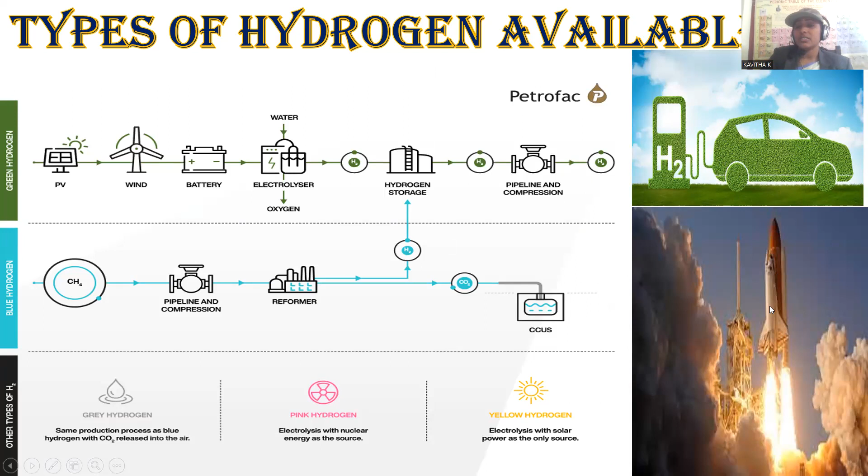Now let us see in detail the description for these hydrogens, whichever available, and along with these you can observe the application of hydrogen. Hydrogen is the primary element in the hydrogen-oxygen fuel cell construction, which is the primary energy source for rocket fuel.

Here you can observe the categorization of hydrogen: gray hydrogen, blue hydrogen, and green hydrogen. Gray hydrogen's starting material is natural gas, which gets split into elemental species like hydrogen and carbon. Whatever is present in the natural gas gets converted into carbon dioxide, but here the carbon dioxide is emitted directly into the environment, which may show an adverse impact on the environment.

Next is about blue hydrogen. Again, the starting material remains the same, but the hazardous impact gets controlled here, because whatever byproduct carbon dioxide is there gets stored and reused. Hydrogen gets captured and can be utilized for various predefined applications. So this is about blue hydrogen, and next is about green hydrogen.

Green hydrogen is produced with sustainable protocols where splitting of the water molecule into hydrogen and elemental oxygen is possible. Electrolysis is carried out, and power generated either by solar or wind gets utilized for splitting the water molecule under external current. There are no carbon dioxide emissions or any other emissions. So it's an emission-free process, green hydrogen. Zero emission is possible during the process, and its application is also provided in continuation.

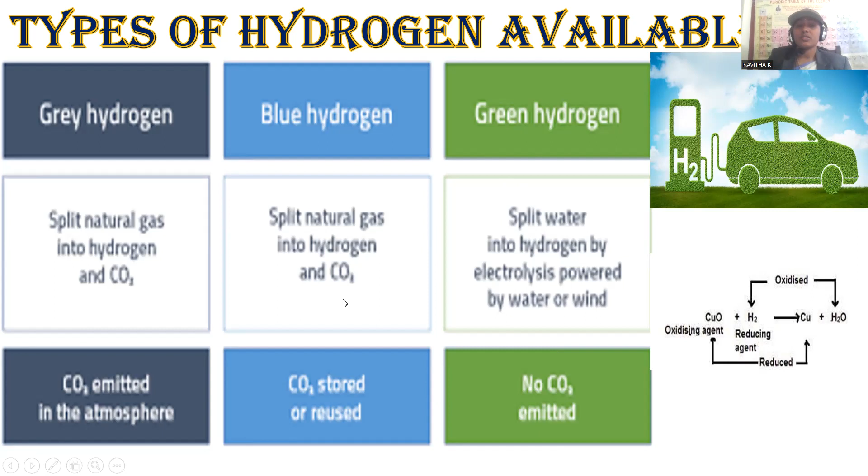Hydrogen is the essential element for the process of production, especially in the metallurgical process. Most combined compounds get pure metal extracted by the process of reduction, where hydrogen is the essential component in order to perform the reduction process. Reduction is simply regarded as the addition of hydrogens.

Detailed discussion is provided regarding green hydrogen production. Green hydrogen is extracted using a method where greenhouse gas emissions are zero. There is a specific concern regarding greenhouse gas emissions, and these are completely discarded during the process of green hydrogen synthesis.

As the name suggests, the production is sustainable and 100% environmentally friendly in nature, and it is adopted by most bulk or industrial scale synthesis of hydrogen by many countries, being 100% acceptable by society and by the environment as well.

Green hydrogen is the most commonly produced kind of hydrogen, by the process called electrolyzation of water molecules, using a device called an electrolyzer. Electrolyzers are subjected to electricity in order to split water molecules into hydrogen and oxygen, with water available in plenty since Earth is covered by around 75% water, with only 25% terrestrial open region available.

That's the reason there is no adverse impact or hurdle regarding the synthesis of green hydrogen. We only have to be conscious about the environment. That is the key point in achieving green hydrogen, because raw materials are abundantly available.

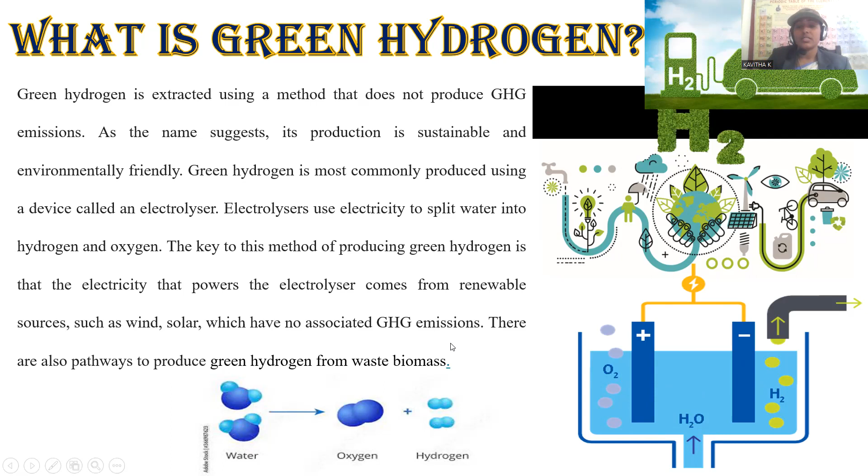Green hydrogen is hydrogen produced by splitting water molecules through the process of electrolysis. To carry out this electrolysis, electricity is required as power, and splitting of water is possible using wind and solar radiation harnessed for this purpose. There are no other adverse emissions or byproducts released during the process—only hydrogen and oxygen are generated, without any hazardous emissions into the environment.

That is what they refer to as the project Petrofac is supporting in Australia, mentioned at the beginning.

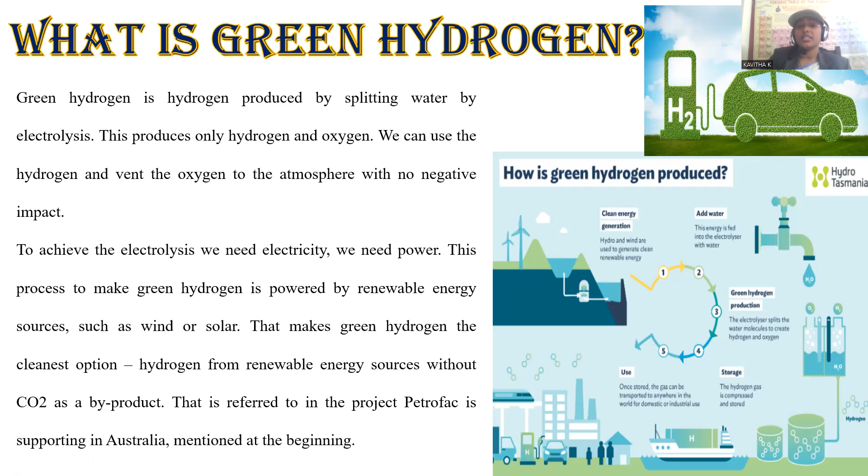This is the kind of pattern adopted by so many countries as they advance, especially in the 21st century, which is mostly concerning not only the development of human society, but also harmony with the environment. That's the reason why all these conditions are coming into the picture, and these kinds of explorations are of higher priority for nations. Gray hydrogen is another kind.

Here a detailed description of gray hydrogen is provided. In gray hydrogen, we perform either SMR or ATR splitting of natural gas, which is taken as the starting material. When natural gas is split by the process of SMR, steam methane reforming, methane is taken and added with steam. Hot water vapor is regarded as steam, so the reforming process is carried out, splitting methane into hydrogen and carbon dioxide.

Another process is called autothermal reforming, where we raise the temperature very high so that splitting of natural gas is possible, releasing hydrogen along with the byproduct carbon dioxide. This is a purely thermal combustion process. The oxidized product can be either complete or partial oxidation of the carbon. Complete oxidation gives rise to carbon dioxide, while partial oxidation gives rise to carbon monoxide as a byproduct.

This has an impact, a slight impact, because carbon monoxide is considered a toxic gas which is not at all preferable. If partial combustion occurs, it may release carbon monoxide, which is hazardous to some extent, because when carbon monoxide is inhaled by any living being, it competes with oxygen and combines with hemoglobin with a strong binding tendency, retarding the absorbance of oxygen, so that the blood is not sufficient to absorb oxygen, making oxygen transportation in the entire body difficult.

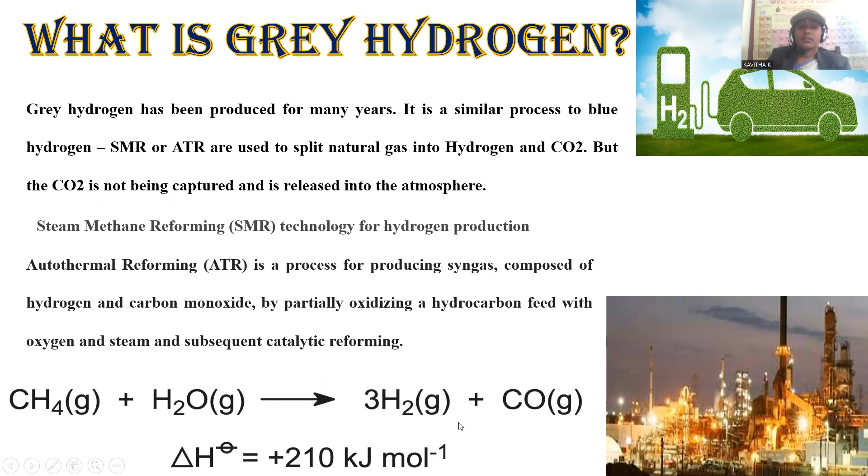This is the system where gray hydrogen gets generated. Now let us see what is meant by blue hydrogen in detail. In blue hydrogen, again, we take natural gas as the starting material. The only slight differentiation between gray hydrogen and blue hydrogen is that the emitted product, like carbon monoxide or carbon dioxide, gets captured by the process called carbon capture, usage and storage.

CCUS is regarded as carbon capture, usage and storage. So the extent of carbon dioxide emitted during the combustion process, during the chemical transformation process, gets entirely captured, so that it does not show any adverse impact on the environment, and hydrogen gets released during the process, utilized for various applications.

This is a sequential arrangement: natural gas is taken, and carbon monoxide or carbon dioxide gets released. If partial oxidation occurs due to inadequate oxygen, carbon monoxide gets evolved. If excess oxygen is available, carbon is completely oxidized and converted into carbon dioxide, which gets reformed, and hydrogen gets extracted. The device called carbon capture, usage and storage is available to absorb the entire carbon dioxide, acting as a sink for it.

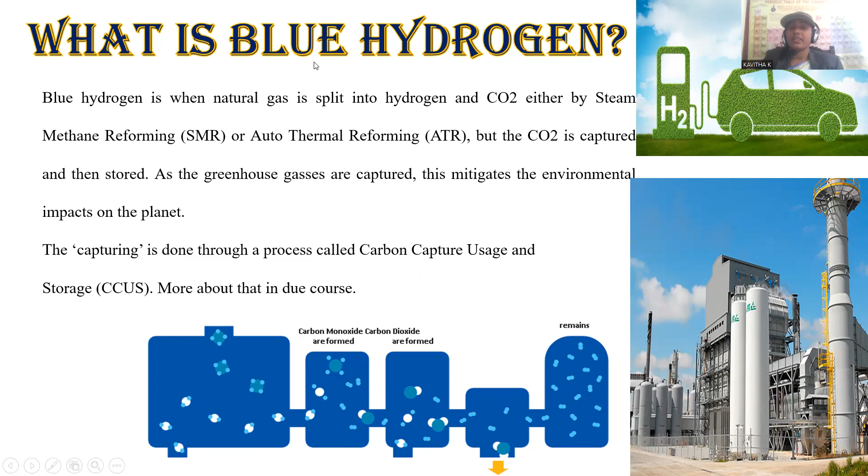So this is regarded as blue hydrogen. It also has equal potential as green hydrogen. Here the sequential production plan is provided: methane, being the major component of natural gas, is taken into consideration and converted into hydrogen, with carbon dioxide evolved at high temperature through thermal chemical transformation. Whatever carbon dioxide is released is permanently stored, permanently absorbed by the carbon capture, usage and storage system.

Hydrogen is an essential component for all our daily life applications, for electricity production as well as clean energy generation, even for transportation fuel, power generation, and warming buildings, and even sustainable survival of the cities and rural regions. This gets applied, and even for industry it will become the primary fuel.

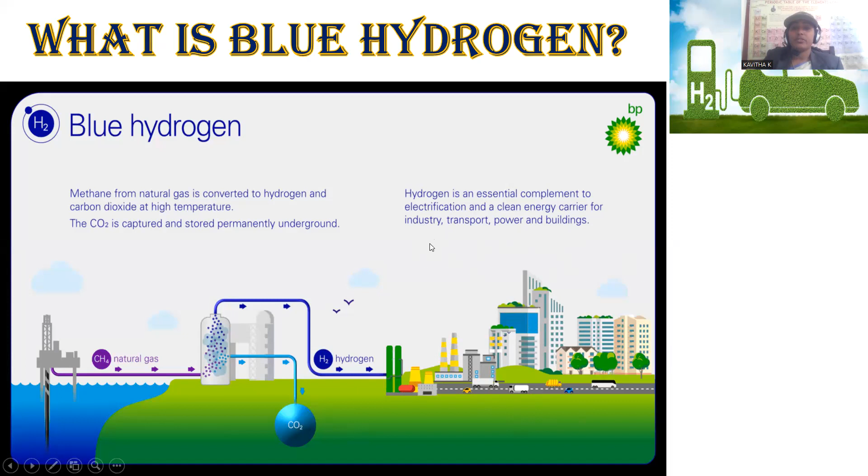So this is about blue hydrogen. Now let us see similar green hydrogen.

Pink hydrogen is made via electrolysis but using nuclear energy. So pink hydrogen is another kind. Here also water gets electrolyzed, but electricity is generated during the process of nuclear reaction. Nuclear fission reaction gets carried out.

Some of the elements of higher nuclear size are having less stability. So here especially f-block elements are being treated as radioactive in nature because of larger nuclear size. In order to get stability, they are having continuous emission of radiation, and alpha, beta, gamma radiations are emitted by these nuclei.

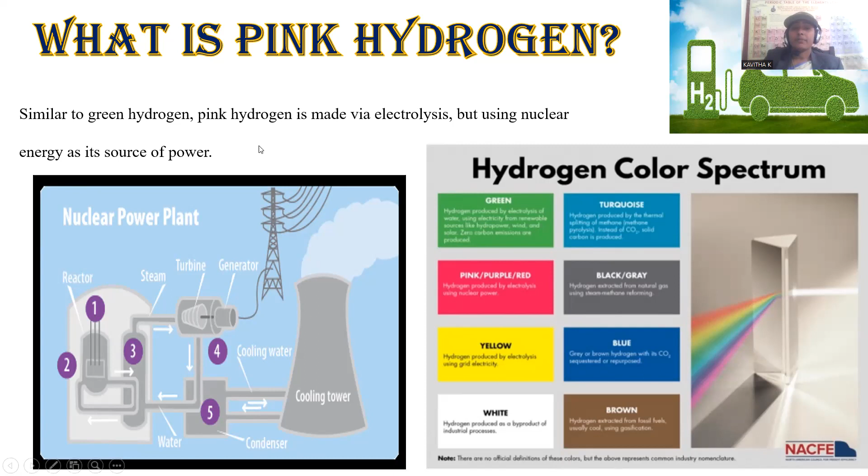Purely these nuclear processes, so this kind of fission and fusion reactions are nucleus oriented, and here this nuclear process is used to generate large amounts of energy. So here that energy can be utilized for the electrolysis of water, and subsequent hydrogen evolution is possible, and that can be applied for various purposes. This is regarded as pink hydrogen.

Now another type of hydrogen called yellow. Yellow hydrogen, just now we discussed, is nothing but again here electrolyzer is the device where electrolysis of water gets carried out in order to split water into hydrogen and oxygen. Oxygen directly evolves into the environment, which may increase the quality of air, because oxygen quantity will be the measure of the quality of air. Greater the oxygen quantity in the air, greater will be the quality of air. That will not show any negative impact on the environment. And hydrogen generated during the process gets collected.

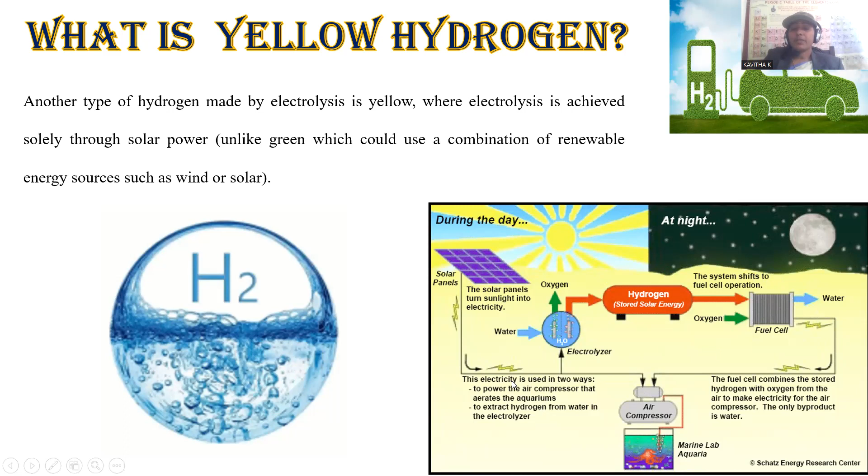For this kind of electrolysis process, we are taking sunlight into primary consideration. Solar panels are arranged in such a manner that they collectively convert solar radiation into electricity. This electricity is now utilized for splitting water molecules into oxygen and hydrogen molecules. Gaseous molecules get released here. This hydrogen gets stored and can be utilized for fuel cells, and even for various other applications. So here the pure concern is about solar radiation being harnessed by means of solar panels, and it gets utilized in the splitting of water molecules, and hydrogen gas is evolved during the process, and this gets applied for various purposes. This is regarded as yellow hydrogen.

Now let us see global hydrogen consumption by industry, to what extent hydrogen is produced, whatever the means of production it will be, and what kind of applications are adopted for this produced hydrogen. In general, a measured quantity of hydrogen is generated by various processes, that may be green, that may be yellow, that may be blue, all these. So the applications purely lie in these sections.

Here, the major content of hydrogen synthesized can be utilized for fertilizer manufacturing. The major fertilizer NPK, among all, nitrogen is very essential for the plant to grow in the croplands. In ammonia production, 55% of the hydrogen generated gets utilized. We are already most familiar that ammonia synthesis is carried out by the process called the Haber process. In that Haber process, we are using this hydrogen in major quantity. This is the major portion of hydrogen synthesized that gets utilized.

Later on, petroleum refining process. Petroleum is a crude product extracted from natural sources, from the earth's crust near ocean regions, where a hydrocarbon mixture will be there along with other contaminations like sulfur, nitrogen, and other impurities. Petroleum refining stands for purification of petroleum oil, especially in order to remove the sulfur content, because if you do not remove sulfur, it may get combusted during fuel combustion, so that your environment gets polluted by sulfur oxide pollution. So that is hazardous in nature.

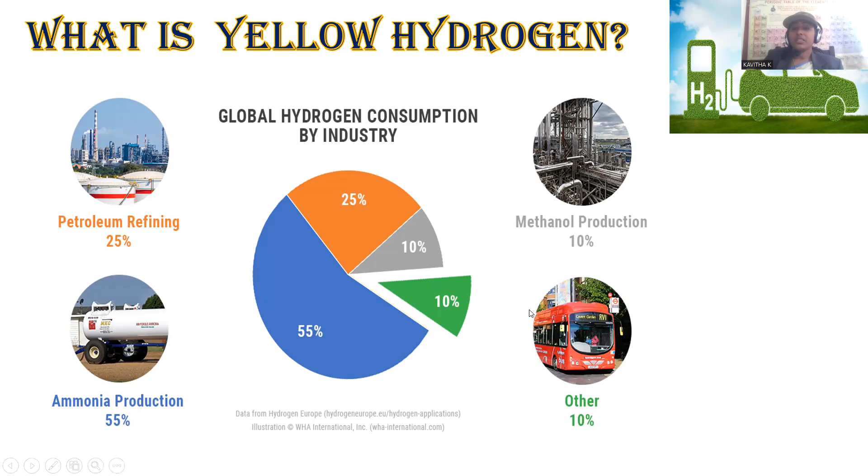Another part will be for other applications, what we are saying as automobile fuel. This minor contribution is provided as of now, but in the future there will be a greater concern, and this will become a major quantity. Wherever automobile and electricity production and fuel cell construction are concerned, these are becoming of primary importance with respect to environmental consciousness. This is indicated with the green part because it is a sustainable factor, and that's why its contribution will be increased in the near future.

Now let us see where we can use this hydrogen. Hydrogen is a very essential element. Just now we discussed its use in the manufacturing of fertilizer. Haber-Bosch is the process where ammonia synthesis is possible. Ammonia is the major nutrient material in order to grow plant species in croplands. NPK are the major nutrient species, and along with them minor nutrients are also required, but the major nutrients are nitrogen, phosphorus, and potassium. So in the Haber's process, nitrogen gets reacted with hydrogen.

Hydrogen is treated in the presence of a catalyst. Iron can be taken as the catalyst, and extremely large pressure conditions get applied - 1,000 atmospheric pressure, with temperature around 500 degrees ambient conditions. Nitrogen gets mixed with hydrogen in the presence of the iron catalyst, and formation of ammonia is possible. This is a major fertilizer, and this is a major role of hydrogen in industrial application.

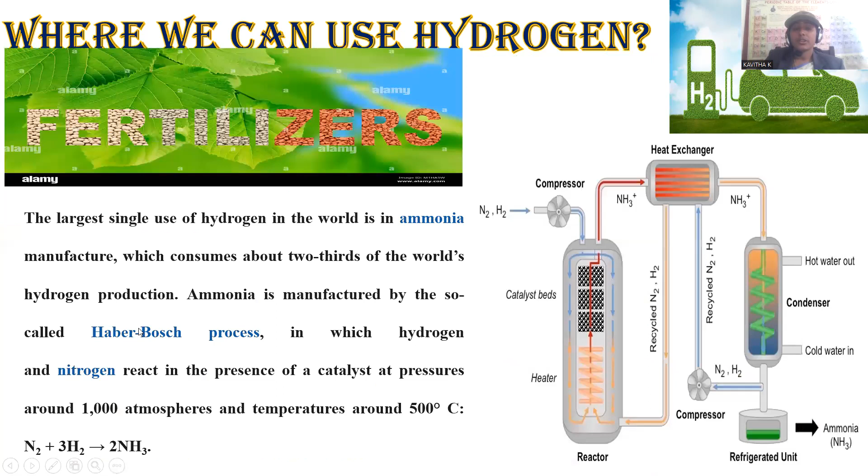NPK - nitrogen, phosphorus, potassium - are very essential for the healthy survival of a plant. Nutritional crops will be yielded when these are present in adequate quantity in order to grow them. So among all these, the nitrogen synthesis Haber's process requires hydrogen in major quantity. And in another application, hydrogen will be used as automobile fuel.

Power is generated by converting chemical energy into mechanical energy, especially in automobiles, wherever chemical energy is there in the fuel. Whatever fuel we take into consideration gets converted into mechanical, movable energy - machinery movable energy. That is the major kind of transformation in case of automobile fuel application. Here fuel gets combusted in the presence of oxygen, because the very essential element for combustion is oxygen. Electrical motors or internal combustion processes get carried out. If you take even petrol or diesel, these also get combusted internally and subsequently converted into energy that is used to move the vehicle.

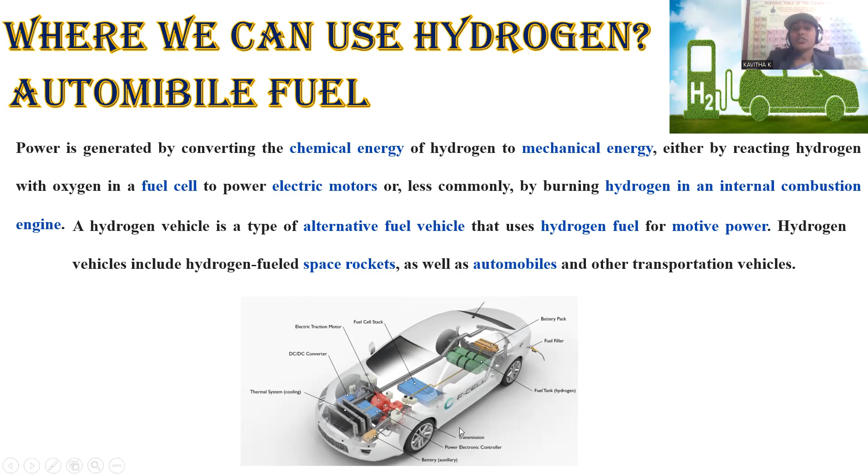In a similar manner, hydrogen is combusted in the presence of excess amount of oxygen. The power generated will be higher in efficiency when compared to all the remaining fossil fuels. Here high efficiency will be there and zero environmental impact. That's the reason why it is regarded as the most efficient automobile fuel. Hydrogen fuels for motive power - hydrogen vehicles include hydrogen fuel space rockets, automobiles, and other transportation vehicles as well. Now there is great research and great effort regarding making hydrogen into a fuel to run vehicles.

Some chemical theory was provided over here - how the combustion gets carried out and how energy is released during the combustion of hydrogen. As we are aware, 2 moles of hydrogen get combusted in the presence of 1 mole of oxygen, and subsequently water gets released as a product along with excess amount of energy. From where is this excess amount of energy coming? Let us see the energy calculation perspective by means of transition state theory. In order to explain this, we have 2 moles of hydrogen and 1 mole of oxygen, where the energy profile is provided on the y coordinate and the reaction progress is provided on the x coordinate.

When hydrogen molecules combine with oxygen, what happens? They will reach their transition level, so there will be a rise in energy. Because by the ignition process we are providing excess amount of heat to them so that they get excited. This is said to be the activation energy, which is required in order to combust this. After getting this, what happens? They get transformed into the product, water. Water is the ultimate product over here, whose energy will be extremely low. Along with this product, whatever energy difference is there, that energy will be liberated. That is the driving force for these automobiles.

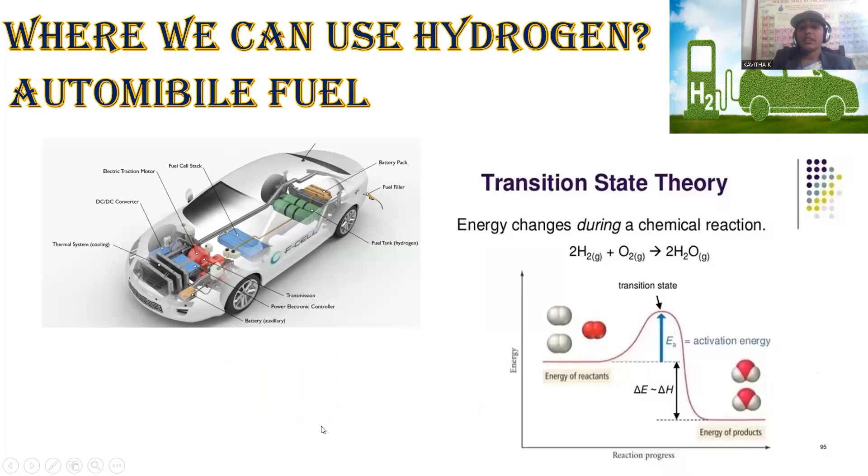2 moles of hydrogen get combusted in the presence of excess oxygen, so that water molecule is evolved along with the liberation of energy. Why? Because the product produced has lower energy compared to the starting materials. This energy difference is liberated in the form of exothermic heat that can be utilized for the movement of vehicles, automobiles. So it is 100% energy efficient in nature.

So all countries are planning towards hydrogen fuel stations. Just like our diesel fuel station, and even natural gas fuel station, LPG fuel station, auto gas fuel station, likewise there is an upcoming trend for these hydrogen fuel stations.

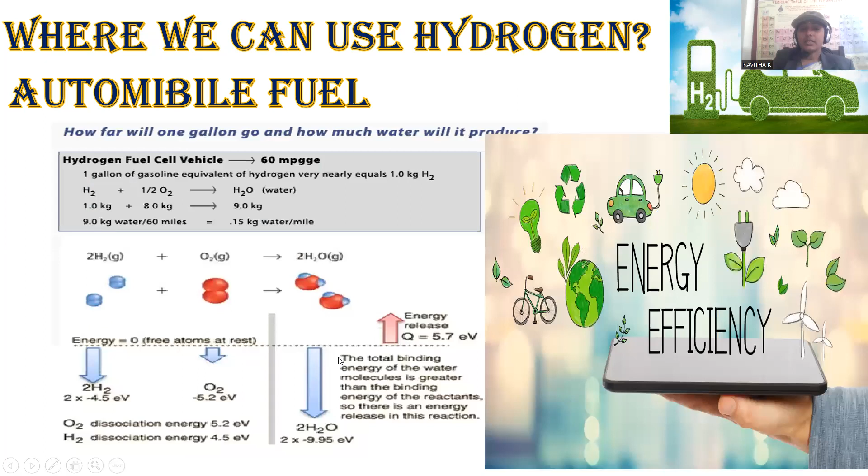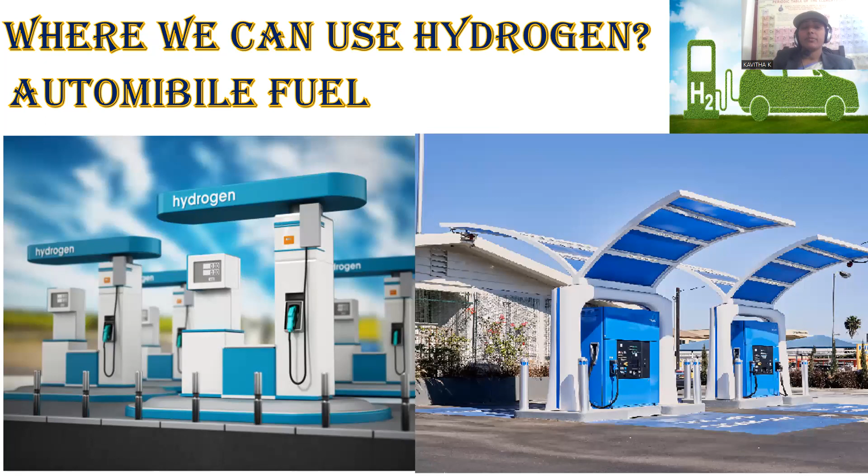Hydrogen is very safe to handle, safe to the environment, and very economic in nature. It's available abundantly and economically, and this will lessen or reduce the burden of fuel imports, because water is available everywhere, we can transform that water into hydrogen, so that subsequently it becomes the greener fuel and efficient fuel as well.

Now let us see how hydrogen can be utilized for the refining of petroleum. What is the role of hydrogen in the refining of petroleum? Refining of petroleum deals with the purification of petroleum, because petrol available in the earth's crust comes with all the contaminations available in its surrounding. Moreover, it is composed of a range of hydrocarbons instead of a specific hydrocarbon composition.

Petroleum is composed of hydrocarbons of C1 to C30. Lower hydrocarbons are gaseous in nature, in-between hydrocarbons are liquid in nature, and higher hydrocarbons are solid residue, tar type materials. Along with them, other contaminations like sulfur, nitrogen, and other impurities may be associated with these petroleum oils, so that without proper treatment, petroleum oil may not be suitable for automobile fuel consumption.

That's the reason why proper treatment, proper purification is required - that is the process called refining. During the refining process, what's the role of hydrogen? Hydrogen for the refineries is increasingly provided by industrial suppliers. It is the second most primary use of hydrogen.

Petroleum refineries use hydrogen to lower the sulfur content in fuel. Lesser the sulfur content in the fuel, greater will be the efficiency, because while it is also a kind of combustible material, after combustion the emissions are not at all preferable for environmental healthiness. That's the reason why sulfur may not be preferable to be associated with any kind of fuel.

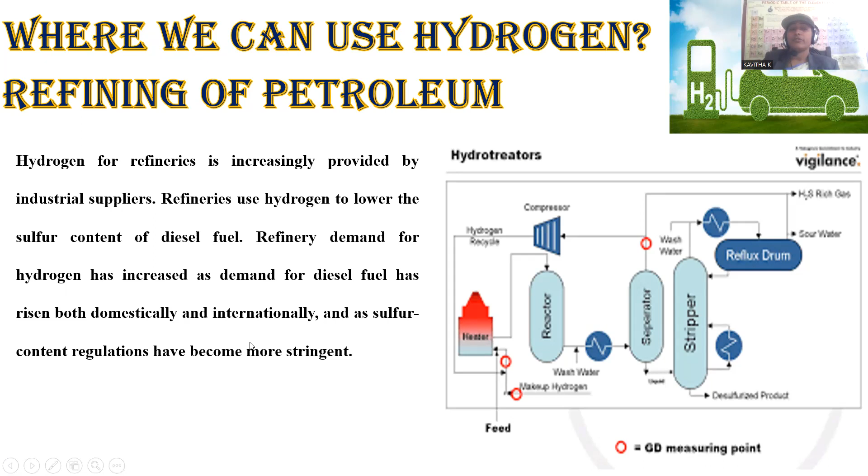So here, sulfur removal requires the addition of hydrogen. Refinery demand for hydrogen has increased as demand for diesel fuel has risen both domestically and internationally. So at local level, national level, and international level, sulfur removal is the primary implication. That's the reason why hydrogen is majorly applied for this kind of refining or purification process.

Sulfur from the fuel is removed by the chemical process called hydrodesulfurization. What is meant by hydrodesulfurization? Desulfurization is nothing but removal of sulfur. Hydrodesulfurization is, by the addition of hydrogen, we are removing sulfur in the form of dihydrogen sulfide. That is the chemical process regarded as hydrodesulfurization.

Hydrogen binds to the sulfur and is converted into hydrogen sulfide, a rotten smelling material that is the combined product evolved during the process. So the sulfur will be discarded from the petroleum oil - this is a kind of refining to remove the sulfur. Further, the hydrogen sulfide emitted from this refining process will be captured and processed properly in order to detoxify it before release into the environment. The sulfur content is the indicator of quality of the crude oil, and determines the process steps required for the refining.

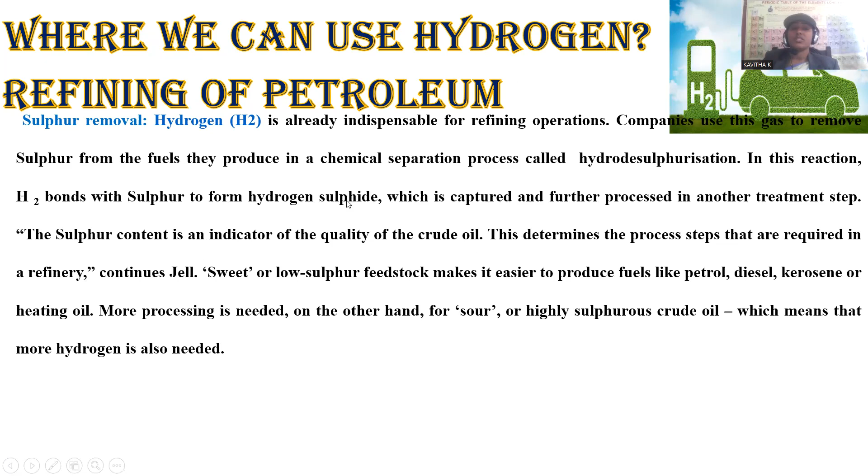Sweetening process, sweetening is nothing but removal of sulfur. That is the commercial name for removal of sulfur from petrol. The low sulfur content can be achieved by addition of adequate quantity of hydrogen, so that sulfur is removed in the form of dihydrogen sulfide. This is a kind of refining of petroleum oil.

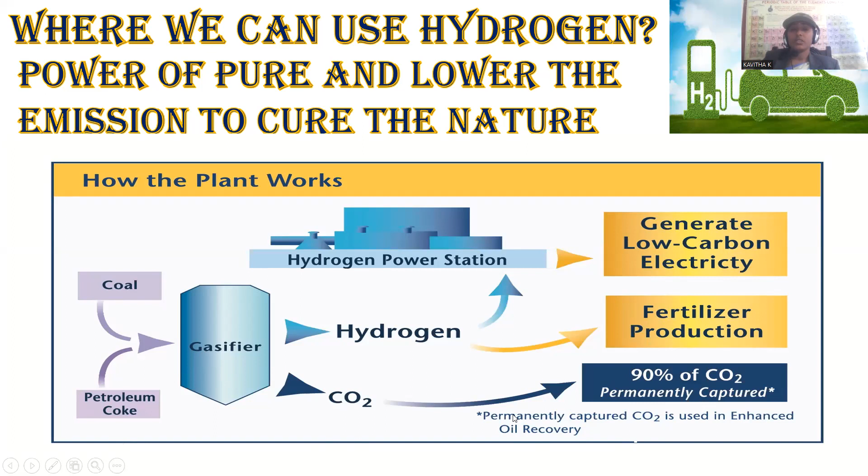Now let us see how it is possible. Petroleum coke is taken in a coal gasifier. Hydrogen is evolved along with carbon dioxide. Hydrogen liberated can be used for the hydrogen power station, and wherever we have applications like electricity, fuel, and even fertilizer production, this hydrogen can be utilized. Carbon dioxide evolved can be treated and permanently captured by the carbon capturing and storage system. This is a kind of hydrogen production process.

Now, where can we use hydrogen to lower emissions and cure nature? How can we say hydrogen is beneficial for humans as well as to nature?

During power generation, hydrogen is one of the leading options for storage of renewable energy. Hydrogen and ammonia can be used in gas turbines to increase power system flexibility. Ammonia could also be used in coal-fired power plants. So not only hydrogen directly, but also ammonia produced.

The primary application of ammonia is fertilizer. In addition, we have applications in power generation in thermal power plants, like in coal-fired power plants.

Hydrogen fuel cells produce electricity by combining hydrogen and oxygen. When hydrogen and oxygen combine, what happens? The product will be water. No other emissions will be there. Hence we can say it is very pure, efficient, and low emission, and that's the reason it helps cure nature.

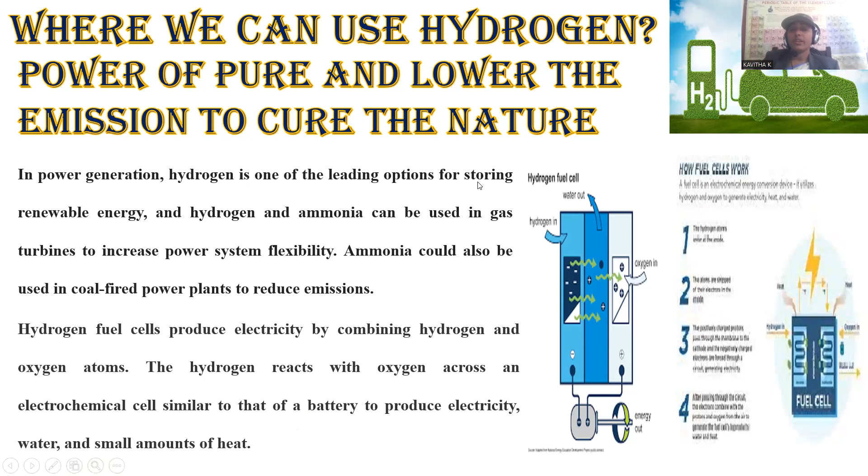The chemistry involved in this hydrogen oxygen fuel cell: hydrogen is used to release electrons, converted into H plus, and the electrons get captured by oxygen in the cathodic region, where the reduction process is carried out. Both are ultimately converted into water. That's the product generated in the fuel cell, which does not emit any hazardous gases into the environment, so it is 100% eco-friendly in nature.

As of the end of October 2021, there were 166 operating fuel cell electric power generators at 113 facilities in the United States, with a total of 260 megawatts of electricity generation capacity installed.

This is a kind of exploration and extension of this kind of product into the market in order to avoid the hazardous impact of fossils and other kinds of fuels. That's the reason why there is extending consciousness towards hydrogen working as the fuel of the future.

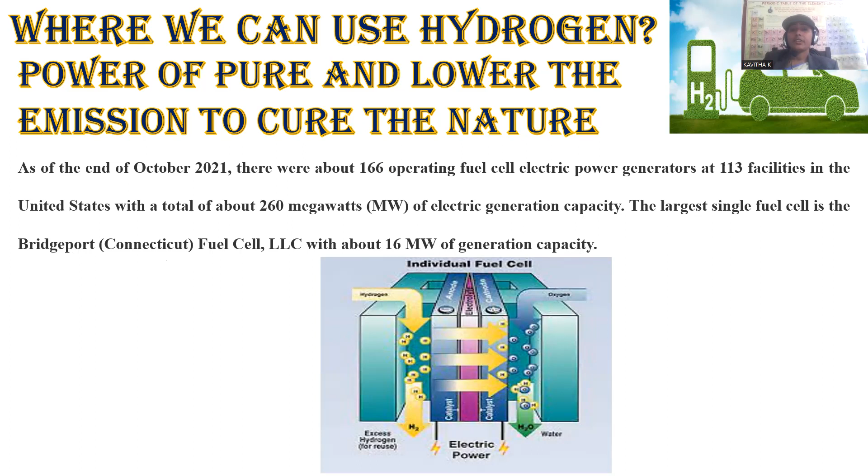The largest single fuel cell is Bridgeport Fuel Cell LLC, with 16 megawatts of generation capacity, launched by the United States in order to produce hydrogen at bulk scale. So the process is underway in order to synthesize hydrogen in bulk quantity, and it will become a better and efficient alternate for fossils.

Samples of plastics. Here is another segment we are going to discuss, which is very much essential: how can we convert exhaustive garbage into efficient hydrogen? Nothing will be wasted which is available in the universe, because everything will be more precious, whichever is provided to us. The thing is the perspective, in what way we are treating that material.

So even the wastage, even the garbage, even the discarded products, whichever present, can be treated in a proper way, so that it becomes a valuable essential material and can be reused several times. That will benefit humans as well as our environment and surroundings. That's the reason why I feel this will be an important segment of today's lecture.

The samples of plastics were pyrolyzed at the bottom of the reactor. So plastic, what is meant by plastic? Plastic is a polymer composed of carbon and hydrogen solely. That's the reason why, by proper treatment, we can consolidate and extract this hydrogen, which can be utilized for various purposes. The solid carbon is not wasted either.

It can be utilized for another purpose also, because this carbon can be converted into either nano-sized particles, or it can be used in the manufacturing of roads, or this carbon can be taken as a starting material in order to synthesize other materials of organic chemistry. In that manner, nothing is wasted here—that plastic is properly pyrolyzed.

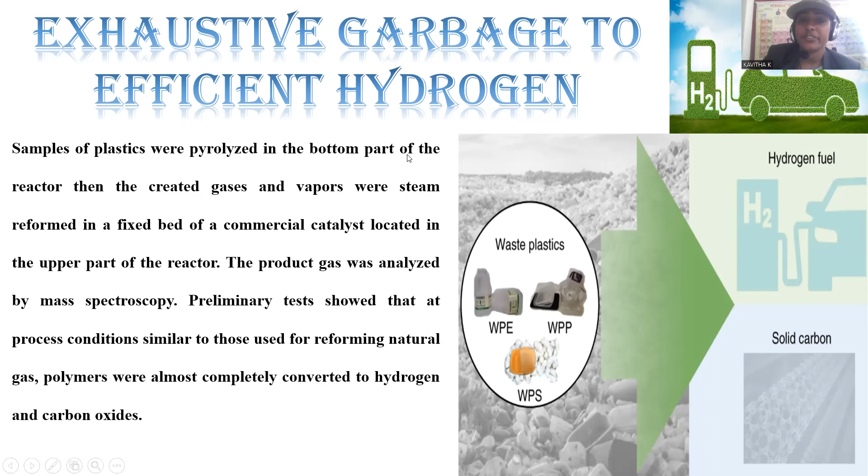Now let us see how the chemical process is carried out here. We take the polymeric chain, made up of carbon and hydrogens in this manner, where n denotes the number of repeating units present, and longer chains may be taken. This plastic is treated with a commercially valuable catalyst, especially iron aluminum oxides, so that fragmentation of these hydrocarbons into hydrogen and solid carbon concentration is possible.

With further treatment, one more step gives us this hydrogen. Recovery of hydrogen will be highly energy efficient, with 97% recovery possible without any wastage. Hydrogen is not wasted, and the carbon generated is also not wasted again - it may be converted into carbon nanotube material, so that nothing is wasted. 100% effective recovery is possible by means of this garbage to hydrogen process.

But substantial protocols and substantial optimized conditions should be employed in order to get effective collection of the final products. So this is a kind of system where garbage can be converted into hydrogen.

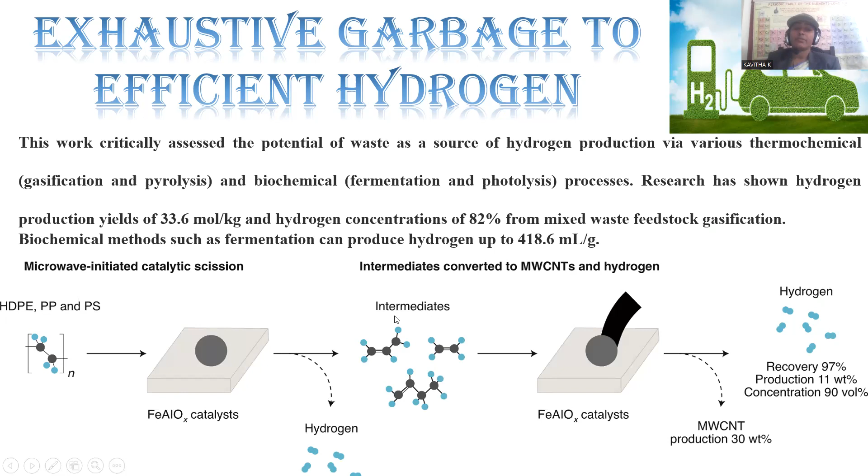Now, a California startup can convert rubbish, that is garbage, that would otherwise go to landfill or incineration, because every day, especially in urban regions, solid waste management is a primary problem. Municipal solid waste treatment, either landfill or incineration, are the only conditions which we can use to treat them.

So if you consider this garbage as a valuable raw material to synthesize hydrogen as a starting material, already the work is under progress. A California startup takes this rubbish into consideration and converts that garbage into hydrogen. The startup can take municipal solid waste and rubbish thrown away by homes and business or industrial regions. Plastic and hazardous medical waste are also taken into consideration, properly treated, and subsequently hydrogen is evolved as a clean, efficient fuel by a cheaper process, because we are not purchasing any starting materials - we are collecting the starting material from the garbage.

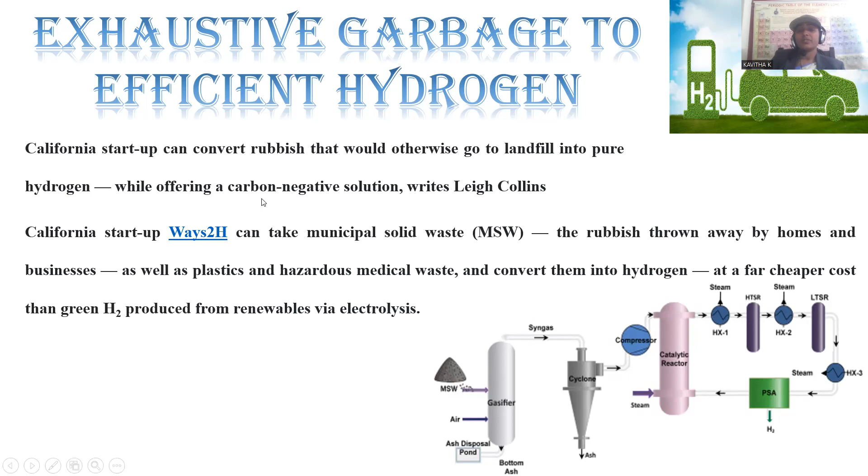That's the reason why it is more energy efficient, economically viable, and even environmentally friendly in nature, and it becomes renewable because garbage will not be in shortage. There is no shortage of garbage, and no shortage for the electrolysis process, so hydrogen production will be continuous in nature. This is 100% helpful for the production of hydrogen from waste.

Now let us see, even in India, we have this same kind of initiative, the same kind of footsteps towards converting garbage into hydrogen. India has a target of 60% renewable energy, amounting to 450 gigawatts by 2030, mostly from these renewable modes of energy sources. This will be the target.

In order to achieve this target, we are planning to take various kinds of renewable energy sources into consideration. In this regard, the government is planning to avoid carbon footprint and emissions - hazardous impact of everything will be subsided, and rather we have to increase environmental consciousness. Eco-friendly conditions are taken as the primary aim of this production target achievement.

For that purpose, agricultural waste - since India is an agriculture-based country, with most people working in this region for food production - after cultivation and extracting crop yields, the waste generated in agricultural croplands becomes a great challenge for disposal. Most of the firing of these waste products may cause environmental pollution or land pollution as well. In order to avoid all this, there is an innovative plan to convert all this agricultural waste into productive hydrogen.

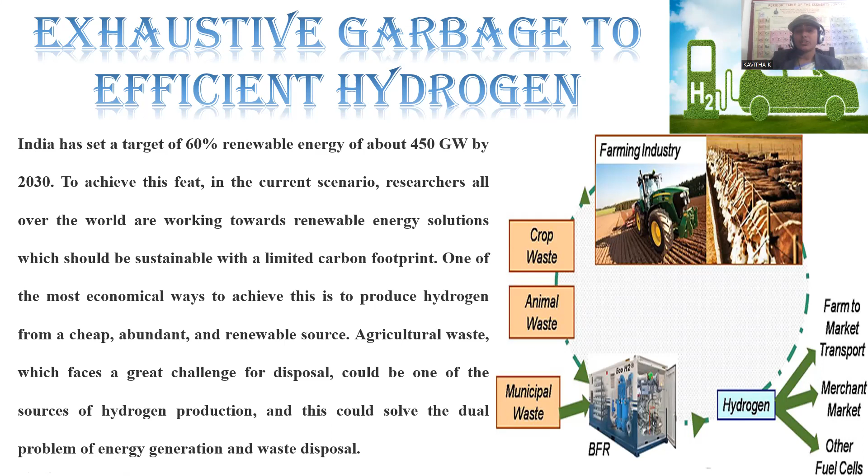Now, a team of researchers from the Agharkar Research Institute, Pune, an autonomous institute under the Department of Science and Technology, Government of India, in collaboration with the scientist lab of KPIT Technologies, have developed this technology at the lab scale to extract hydrogen from agricultural residues. These are the contributing research frameworks to convert agricultural residues into hydrogen. The entities involved are Agharkar Research Institute Pune and KPIT Technologies, accompanied by DST Government of India. They are transforming this waste of agricultural croplands into efficient hydrogen.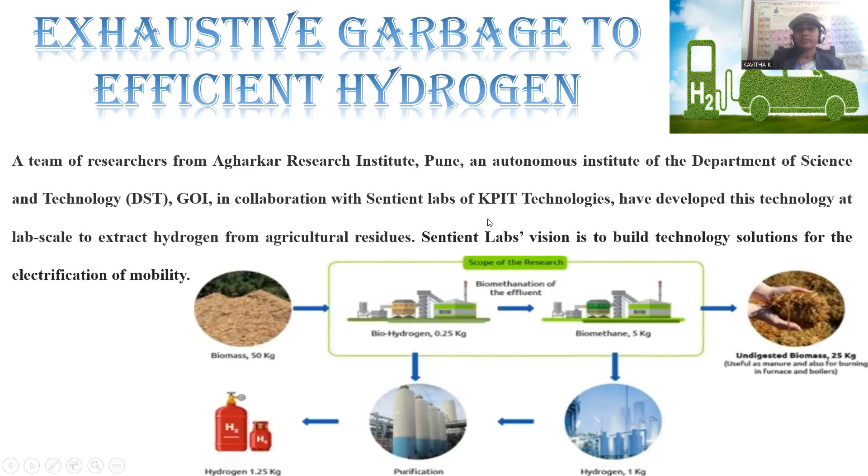So this is the process. This is a research effort in order to avoid the garbage and to synthesize an efficient fuel from this waste.

Now, researchers from the Indian Institute of Chemical Technology, six months, 2017. What they did: food waste was treated with dark fermentation. Microbial action was carried out on the food waste materials, and entirely the material got converted into liquid. During the fermentation process, methane is evolved. Along with the methane, other products generated will be hydrogen, and biodiesel is also generated during the fermentation process. That depends upon the types of microbes we are employing during this fermentation process. So here all these kinds of materials are generated, one of the prominent ones being hydrogen, which is generated by the fermentation process.

Let us see in detail. They collected the food waste in the institute's cafeteria. From the institute cafeteria, they collected the garbage, especially food waste, and completely filtered it. Large particles get discarded, drained oils also removed, and added it to the tower.

A cylindrical tower was taken, which contains the anaerobic digester. Anaerobic digester means in the absence of oxygen, the entire fermentation reaction got carried out, so that oxidized products will not be evolved. So here the anaerobic digester was taken, and the soup of waste and bacteria was treated with that. Suitable bacteria and the soup of waste are also added to it.

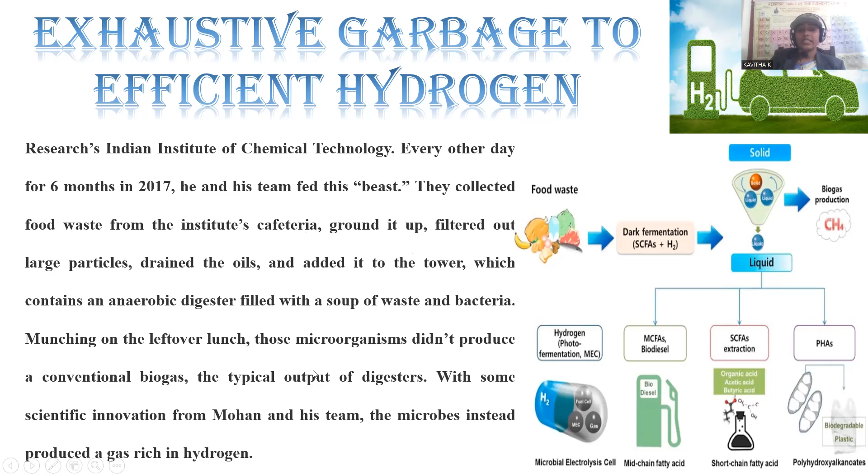In another attempt in the same regard, garbage to hydrogen production, Purdue University is a landmark for such innovations. The scientists developed a method to improve the production of hydrogen from food waste. Here they took yeast as the fermenting material.

In general, yeast is the main system by which fermentation is carried out. Fermentation is the chemical process where complicated hydrocarbons, complicated carbohydrates are fragmented by means of chemicals, enzymes secreted by the yeast, like zymase. All these are used to fragment the complex food materials into simpler form, so that yeast is utilized for the fermentation process and the production of hydrogen is possible, which is taken as a clean fuel.

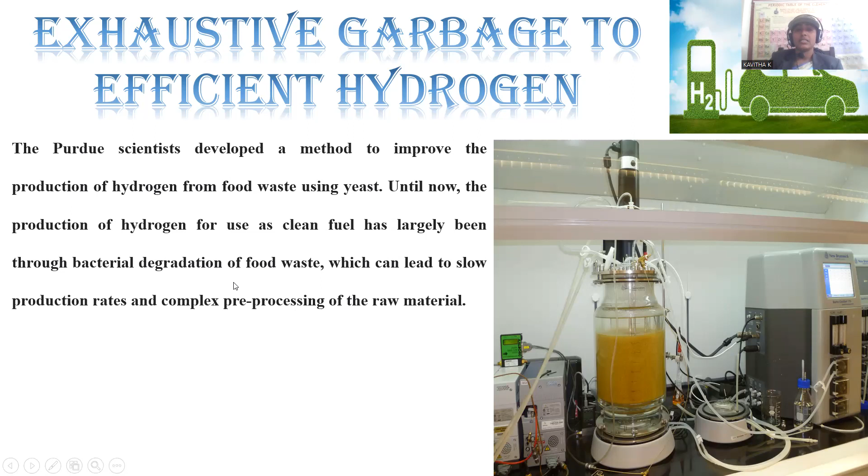Large scale synthesis is also possible with this, and raw materials were taken as the waste discarded as food. Food waste can be collected, and anaerobic yeast fermentation is carried out, so that a clean, efficient hydrogen fuel is originated from this. This is another achievement by the scientists, garbage to hydrogen production.

So here biomass gasification is the mature technology pathway. Biomass is nothing but the energy source available from various living organisms. You may take plant waste, fallen leaves from forest waste, carpenter sawdust is also considered as biomass. Wherever plant waste is there, raw materials are taken, where the hidden energy is stored because of photosynthesis, the energy stored in the plant materials.

So biomass collected from living organisms can be treated through a proper technology pathway and converted into hydrogen, so this is also a system where garbage to hydrogen is possible. Chemically, biomass is regarded as lignocellulose. Whenever photosynthesis occurs, glucose and fructose are produced, and that glucose gets polymerized and stored in the form of cellulose, a special material available in plants. These lignocellulosic materials are rich in energy and hydrocarbons, and the hydrogen present here can be treated through proper technology so that hydrogen collection is possible. In this way also, garbage to hydrogen production is possible.

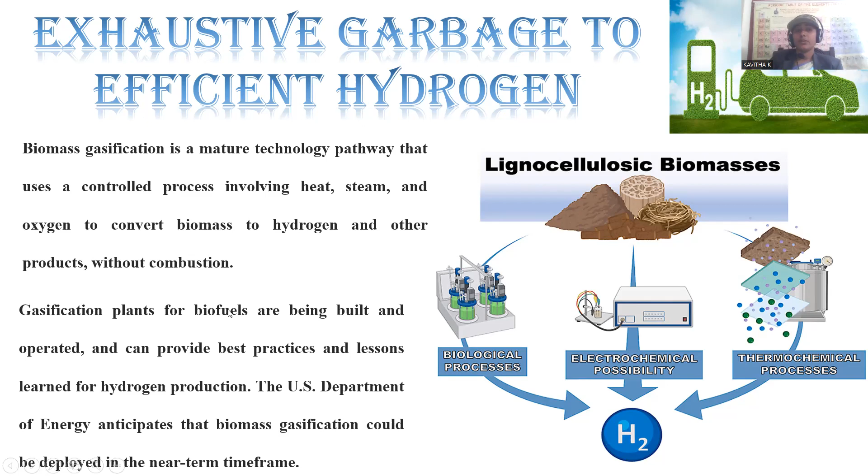Garbage to efficient hydrogen - how can we convert organic waste into hydrogen? That chemistry will be discussed here. One method of generating hydrogen from biomass begins with processing organic materials. Organic materials may include those extracted from natural origin, or synthesized in the laboratory, or already used materials which get converted into garbage - whatever organic material you take as a starting material.

This organic matter is subjected to high temperature conditions without any combustion. We are not supposed to do any combustion here, just rising the temperature. Combustion is possible only when oxygen is there, so the entire organic matter is raised to high temperature in the absence of oxygen, so that combustion does not occur.

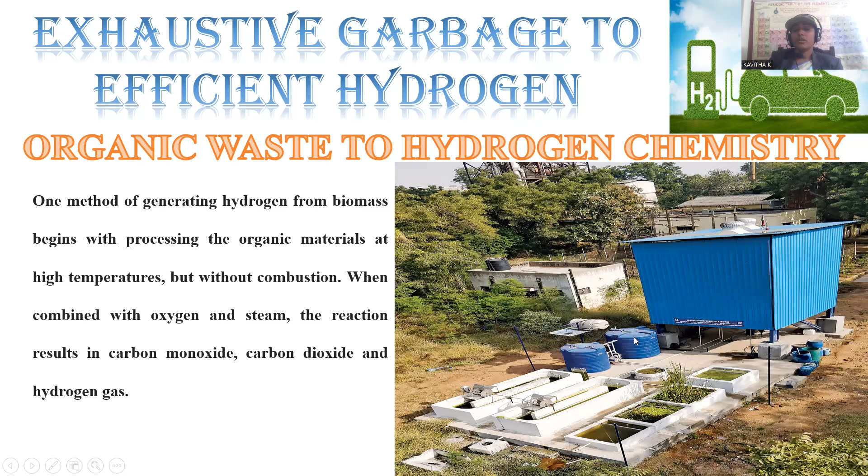When combined with oxygen and steam, the reaction results in carbon monoxide, carbon dioxide, and hydrogen. So by rising the temperature, hydrogen gas evolves, and subsequently the carbon present in the organic matter turns into carbon monoxide and carbon dioxide based on the availability of oxygen. This is organic waste into hydrogen, and this is a plant used to carry out this process - we take the garbage, the organic waste, the plant materials, and raise the temperature very high, and whatever hydrogen is there gets converted into gasified clean hydrogen fuel, with byproducts of carbon monoxide or carbon dioxide that should be properly treated.

We have a concern regarding hydrogen production. There is an international entity for energy security designated as the International Energy Agency (IEA). IEA is an international agency which gives protocols on how the framework should be in order to synthesize safe energy, and they are also focusing toward this hydrogen synthesis.

Producing hydrogen from low carbon energy is costly at the moment. International Energy Agency analysis finds that the cost of producing hydrogen from renewable electricity falls by 30% by 2030, as a result of declining cost of renewables and scaling up of hydrogen production. This is a target fixed by IEA - by 2030, electricity from renewable sources should cover 30%. Fuel cells, refueling equipment, and electrolyzers which produce hydrogen from electricity and water can all benefit from mass manufacturing - this is the target they are fixing.

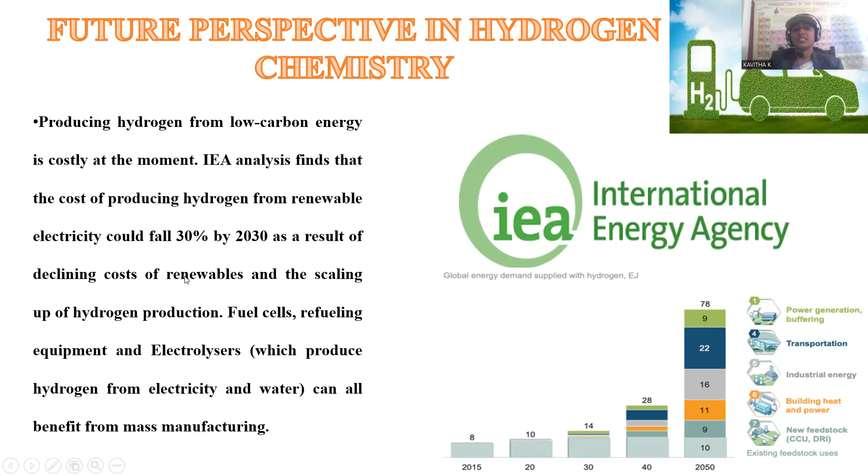Here, for power generation, buffering, and transportation purposes, we can utilize industrial energy from hydrogen. This hydrogen can be utilized for building heat and power - to heat buildings and for power supply - and as new feedstock. In all these cases, hydrogen can be utilized in a safer manner, and they are putting the target for 2030 that 30% of energy contribution should come from renewable sources. This is a primary concern of the International Energy Agency.

Now, the future perspective in hydrogen chemistry - how is India moving towards the future with respect to hydrogen production? What will be the perspective of India? In the Independence Day speech, Prime Minister Shri Narendra Modi announced 5 key initiatives. One of the major initiatives is Mission Hydrogen, the National Mission of Hydrogen. India should become the international hub for hydrogen production and even for export as well.

So it should become the global leader in enabling substantial domestic hydrogen economy. Hydrogen economy should exponentially rise. We have to move forward to that extent, the production of hydrogen from various kinds of starting raw materials. We can collect this hydrogen, and hydrogen production is the ultimate motto for this national mission, being an efficient and cleaner kind of fuel. Ultimately, India should become from energy deficient to energy rich country. This kind of transformation they are planning for. This will be the future perfect perspective of India in this hydrogen regard.

So it can even make in India, it is a part of the Make in India scheme, because entrepreneurs should come forward to facilitate the process of hydrogen synthesis, and India should become the exporter of energy. Hydrogen is considered one of the most sustainable, substantial fuels of the future. This is a target for India.

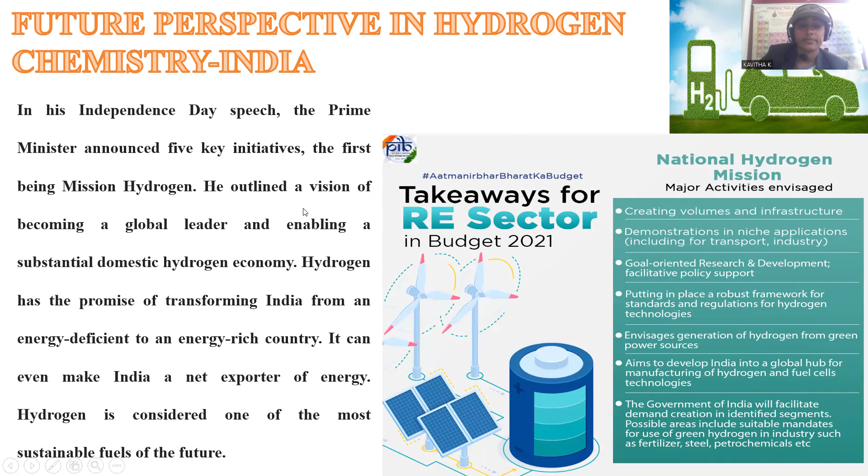By the year 2020, it was a record year for policy actions and low carbon hydrogen production. Record production of hydrogen was carried out, with 10 governments around the world adopting hydrogen strategies, and close to 70 megawatts of electrolysis capacity was installed, doubling the previous year's record. Two facilities producing hydrogen from fossils with carbon capture utilization systems became operational, expanding production capacity by 15%. This is a record level rise in hydrogen production in 2020 across the globe. They are preferring to synthesize this hydrogen at bulk scale, and we achieved a 15% rise in production, with an aim to rise further in the near future.

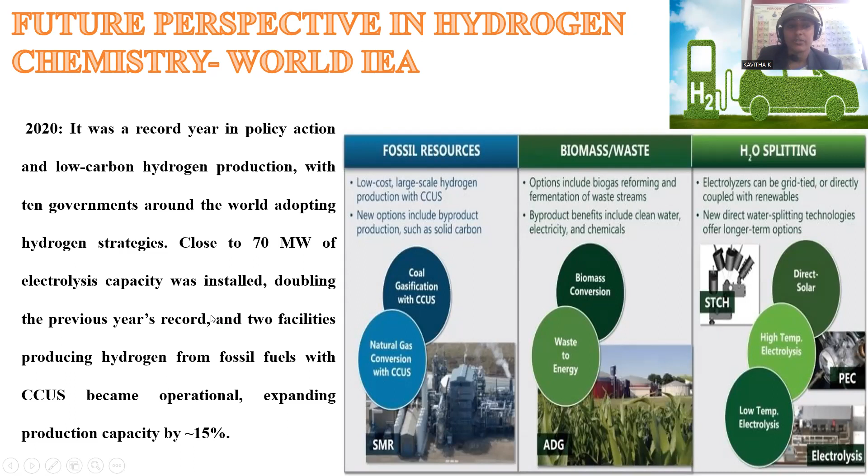Green hydrogen, produced through renewable sources such as solar and wind power, holds significant promise in meeting the world's future energy demands. As the global population is rising exponentially, they demand more energy. We are purely relying on various means of energy sources for our comfort, for our survival, as the technology induced world prefers cleaner, efficient energy for all means of operations and applications.

That's the reason why green hydrogen demand is rising exponentially. In order to meet that future energy demand, there should be a rise in efforts to synthesize this hydrogen exponentially. So here, availability of renewable energy sources vary widely.

Recently, PwC analyzed that the green hydrogen market worldwide has identified potential demand growth and cost trajectories per country, and the most promising export and import markets. The result gave policymakers and industry leaders guidance on how the future market for green hydrogen could evolve. So here, how green hydrogen synthesis is possible, and in what way it can be applied in order to meet the energy demands of the world in the future - that is the major criteria set by the International Energy Agency.

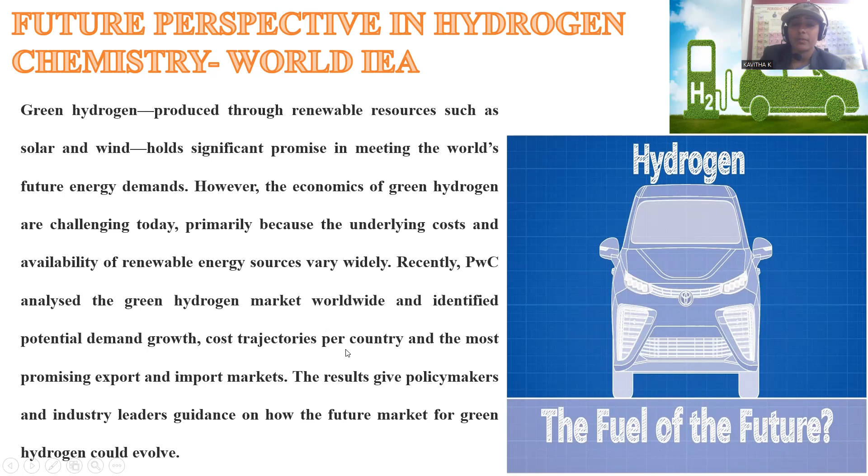Now we can see hydrogen is neither fossil nor fugitive, but found amply in nature, hence undeniably the fuel of the future. I would like to repeat one more time: hydrogen, neither fossil - that is not a fossil fuel - nor fugitive - that is not discardable - but found amply in nature, an abundantly available material, hence undeniably the fuel of the future. That's the reason why we can say with confidence, hydrogen is considered the fuel of the future.

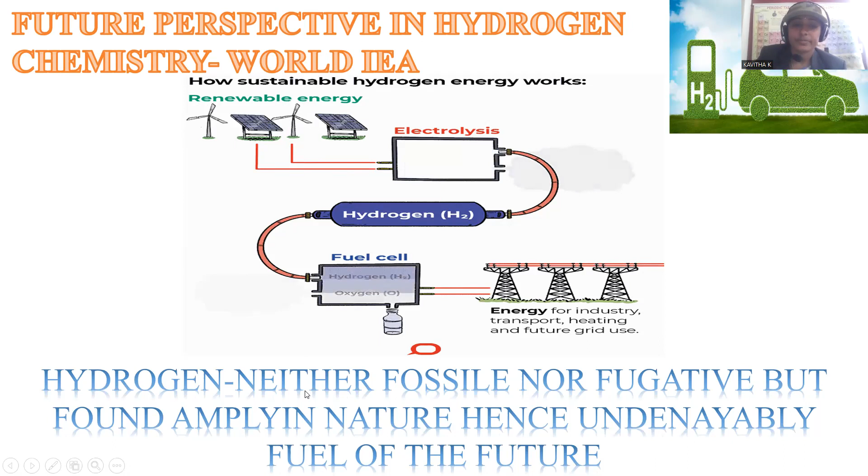Hydrogen, powerful, accomplishable for next gen. By this, I would like to conclude. Hope this session will be helpful for everyone, because we are facing so many problems with the different kinds of fuels we are using now. If we switch to this cleaner hydrogen, it will be more energy efficient, and it will give energy security, economic security, and even environmental security.